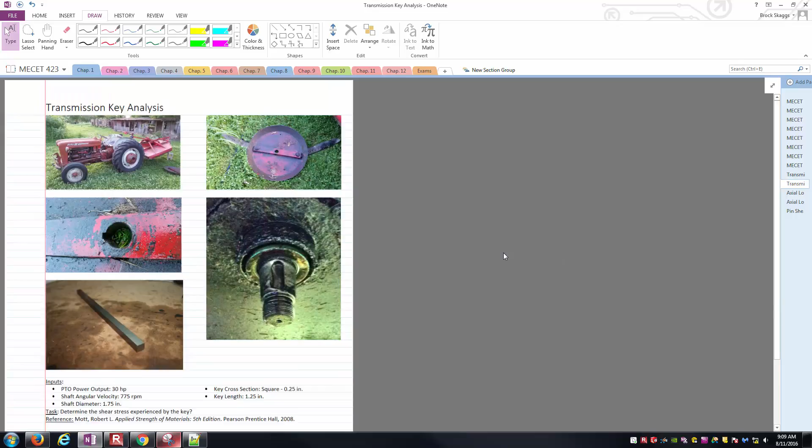Got a few images here to kick the problem off. Top left we've got a tractor, a 1960 Ford 601 tractor that we call Ginger, and on the back end we've got the brush hog here. We're looking to replace the key in the brush hog.

If you're not familiar with a brush hog, it's basically a big old mower. Underneath the deck here, you've got this big plate I've been told is called a stump jumper, and you've got the two blades sticking off of it. If you look under the deck, after you've removed this, you've got this shaft coming down.

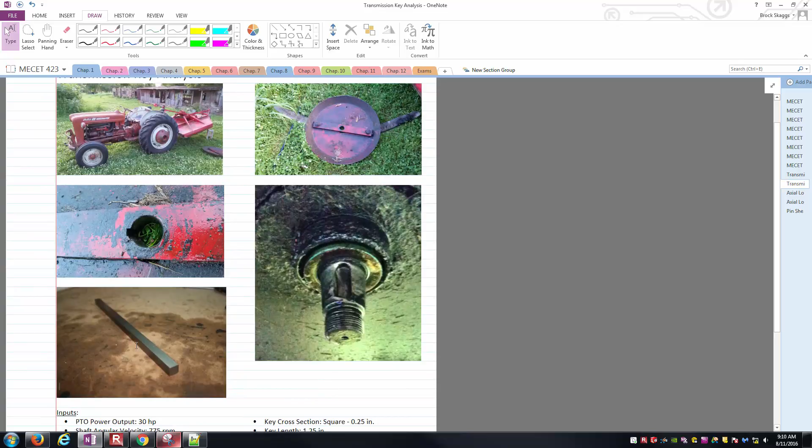In the shaft, you've got this milled key seat, and also in the stump jumper you've got this nice keyway that matches up with it. The idea is you go and buy key stock of the correct size from the store, looking something like this. You cut it to the correct length and stick it in the key seat here. It also fits into the keyway here.

So when the shaft turns, it's able to turn the stump jumper and turn the blades, and of course knock down your brush.

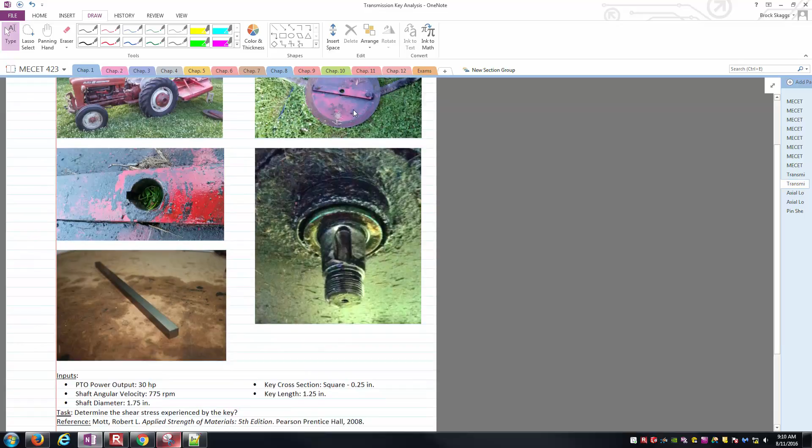So the idea is, if I know some things about the brush hog, the PTO of the tractor, and some stuff about the key geometry, can I figure out what the shear stress experienced by the key itself is? That's what we'll be looking at in this problem.

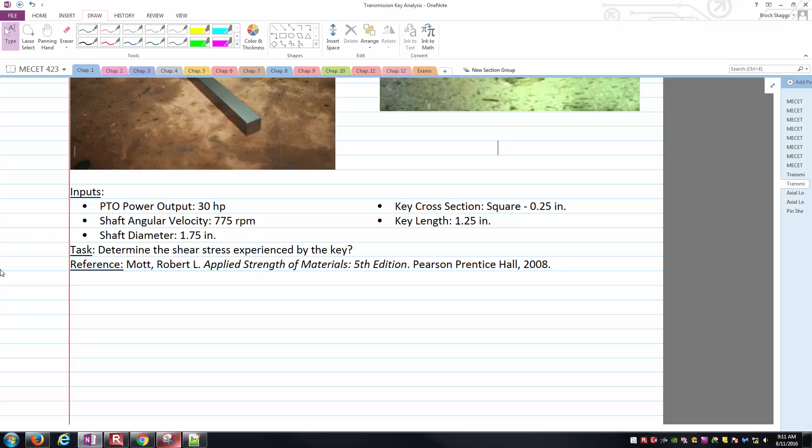To give us some numbers to play with, the PTO power output is roughly around 30 horsepower for the tractor. I'm assuming the shaft on the brush hog is spinning at roughly 775 RPMs. The shaft diameter, this diameter right here, is roughly 1.75 inches. The key cross section is a square cross section, so each side length is 1/4 of an inch, and I'm going to say the key length is 1.25 inches.

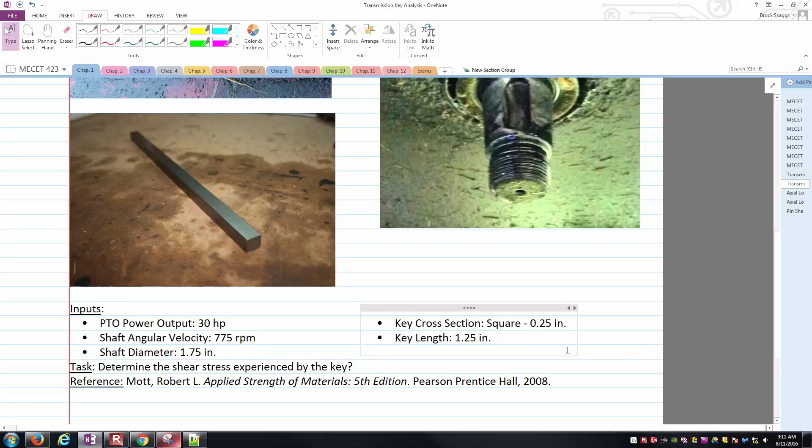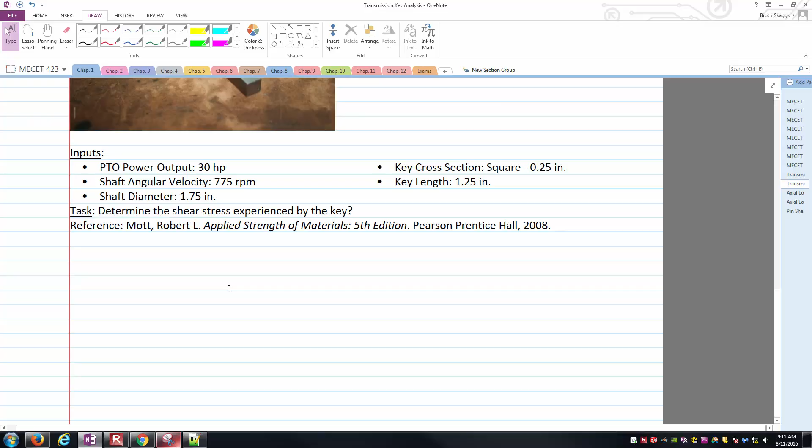This shows just the raw key stock, and then I cut a 1.25 inch section off of it. So the task now is: with that information, can I calculate the shear stress experienced by the key itself, if these conditions are correct?

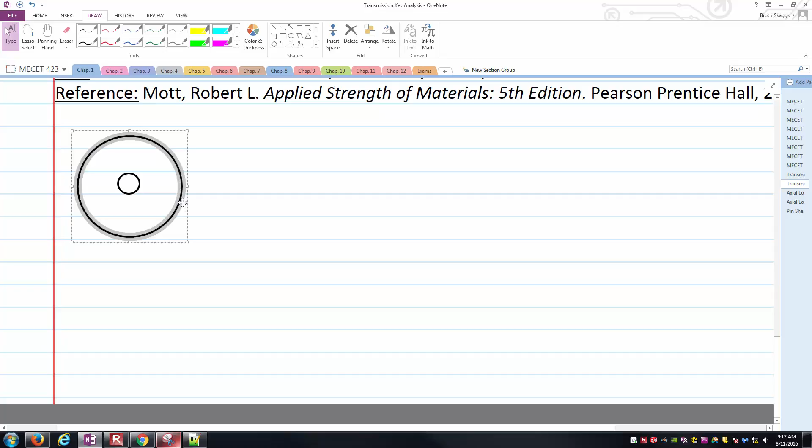Let's do a little thinking about how this problem sets up. I'll make a brief image here - a very simplified view of the key and the stump jumper, that big steel plate the blades are attached to. Let's say that smaller circle is the shaft, and this bigger circle represents the stump jumper plate. What connects them, able to transmit the torque, is our key. We'll draw a key right about here, just like so.

So the idea is, let's say the shaft of the brush hog wants to turn in this direction, clockwise. That means on the very bottom surface of the key, it's going to feel a force pushing it off to the right there. On the top side, you're going to have at least the inertia associated with the big old steel stump jumper plate and the blade itself.

If it's in operation, you're going to feel all the effects of it hitting stuff - weeds, tall grass, possibly small tree saplings, and everything else you've possibly run over. It's going to feel this force going off to the left on the top side of the key.

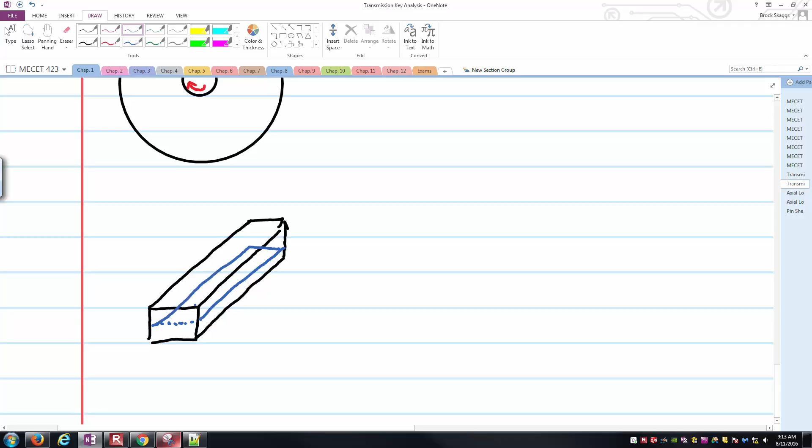If I draw a key down here below, we can start to see this shear stress set up. Say there's the key cross section, here's the length of the key itself. What's going to happen is right in the midplane of this key, on this surface I'm outlining in blue, which is right in the middle of it, we're going to have these shearing effects felt here.

Basically, on the very bottom edge of that surface, we're going to have a force going this way, and a resisting force going on the top. You can see those forces are in parallel with the plane of the area itself.

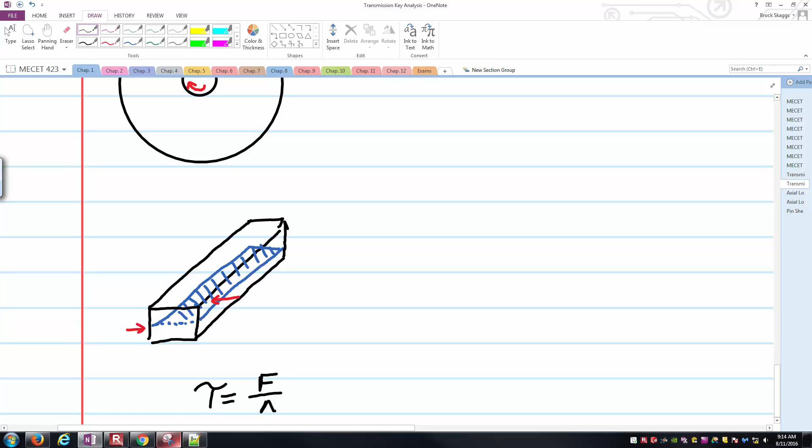So hopefully that's keying you off to thinking, well, hey, there's going to be some shear stresses, tau, and it's a direct shear stress application, so our formula is just like so: the force over the area in shear, where this force would be the magnitude of these shearing forces trying to shear the key in half along that plane.

And the area in shear would be the area that I've shaded there. And so just knowing some things about the geometry of the key, this length here we'll call W, that's the 1/4 inch square side length, and this here would just be the length of the key. So the area in shear would be the product of those two values. That's fairly easy. But what about the force?

If I look up in my inputs, I'm not given any forces at all, right? I'm given a power in horsepower and angular velocity in RPMs. And really that's the closest thing as I have to a force. So we have to start thinking about this a little bit.

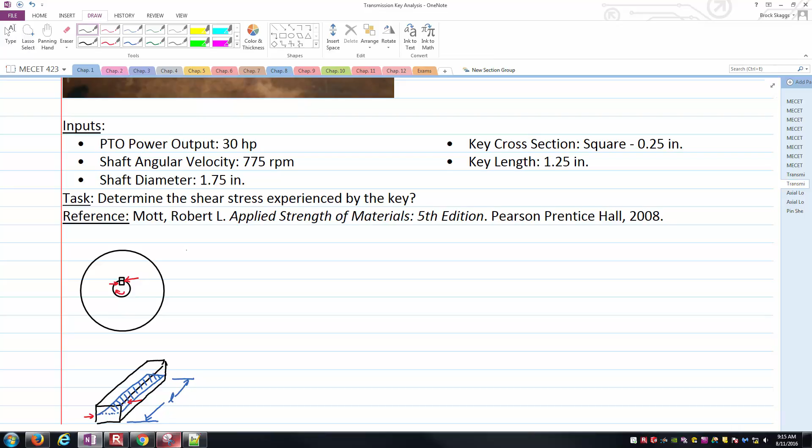One of the things we can do is go from this power and angular velocity to the amount of torque that the shaft is trying to transmit to the stump jumper through the key. And then from the torque, we should be able to relate torque to force, right? T is R crossed F if we're just thinking of vectors in general. So that'll be our route to go. We'll take the power and the angular velocity, we'll get our torque. From the torque, we'll get the force. And then after we have the force and the area in shear defined, we can calculate our shear stress experienced by the key. Let's jump right into that.

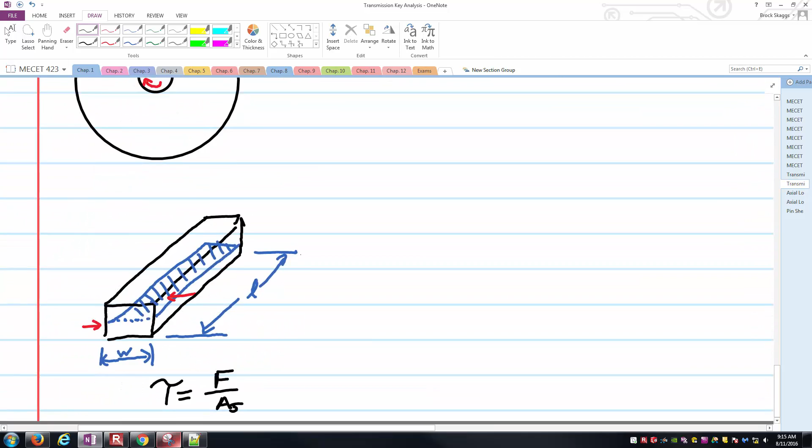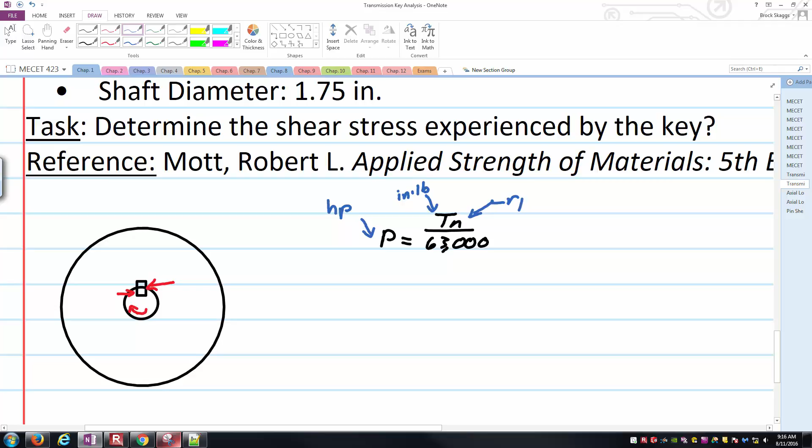First things first, how do we connect power, torque, and angular velocity? In our reference here, found in chapter 4, the formula is P equals Tn all over 63,000 for this type of problem. I say for this type of problem because the 63,000 is just a conversion factor. In order for that to all work out, this P has to be in horsepower, the T has to be in units of inch-pounds, and the N has to be in units of RPMs for the angular velocity.

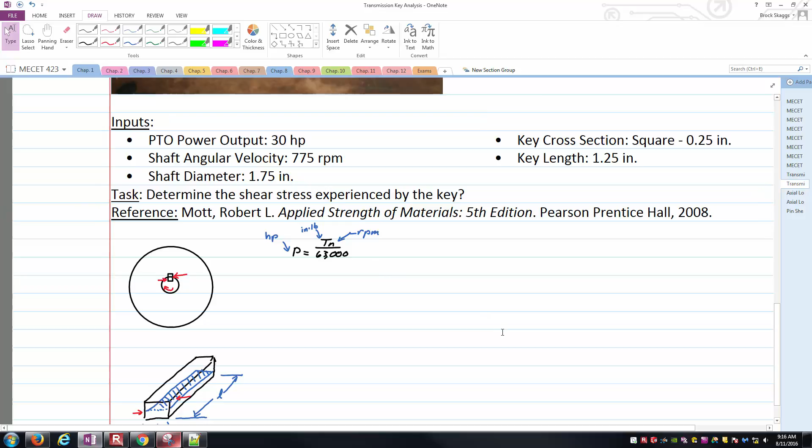And looking back at our units, that's exactly what we have, right? Power is in horsepower, the angular velocity of that shaft is in RPMs, and so now I can solve for the T value, and it'll come out in inch-pounds. So you just have to always be careful of our units here. Let's go ahead and do that right here. T is going to equal: P times the 63,000 unit conversion factor all over the angular velocity N.

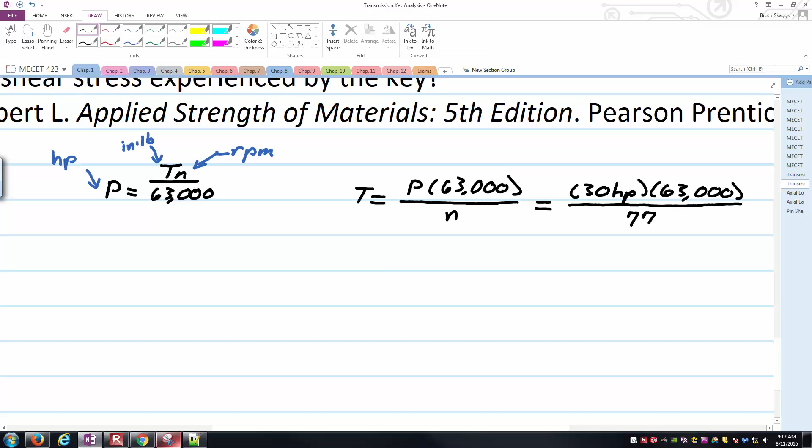So P we said was 30 horsepower times that big conversion factor, 63,000, and then we're dividing it by the angular velocity of the shaft, which we're saying is turning at this instant at 775 RPMs.

Let's slide over here a little bit and see if we can get a value for that. So 30 horsepower times 63,000 divided by our 775 RPMs, I'm getting roughly 2,438.7, units here are in inch-pounds. So getting close to 2,500 inch-pounds. And so that's the torque.

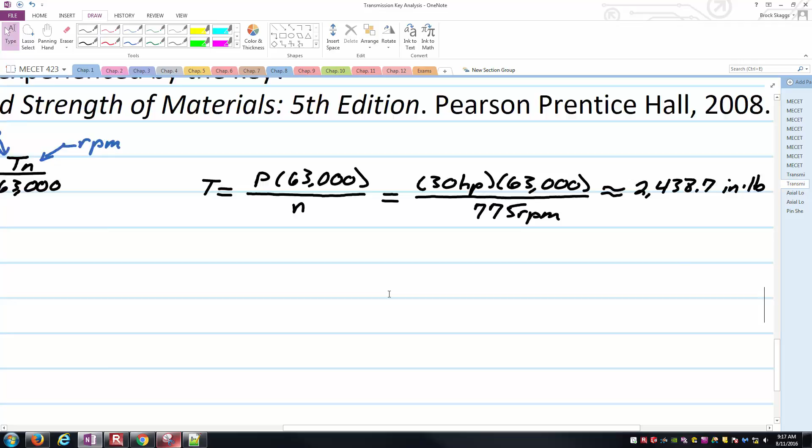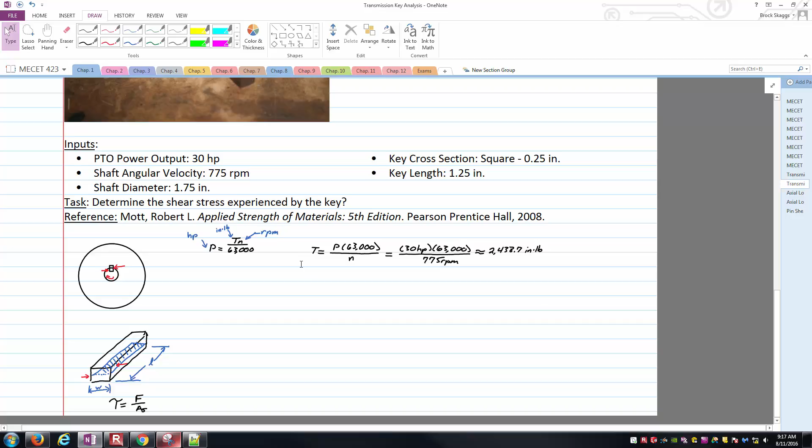But again, we're seeing our home formula, our final formula is going to be tau is force over area in shear. Well, torque is not force, right? So we've got to take this torque value and figure out the force itself. Thinking back to kind of very base general definitions, we've got a definition that torque is always equal to R crossed F, we could deal with if we wanted to play with vectors and the cross product there. Or, this is a little bit more simplified, I'm just interested in the scalar magnitudes of these vectors.

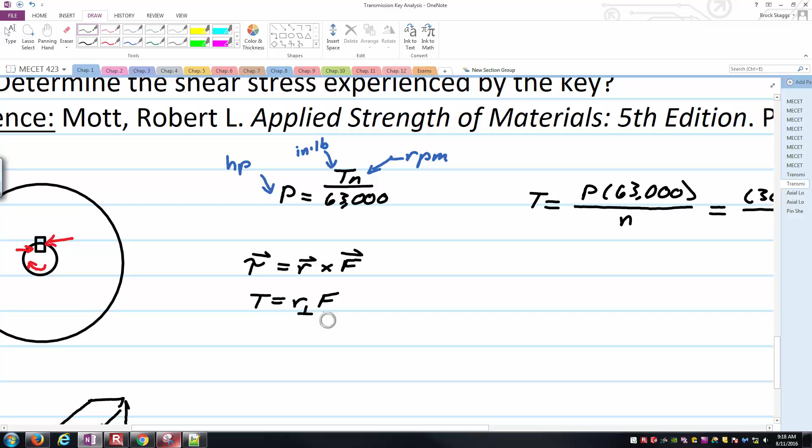One way to look at it is T equals R perpendicular times F, right, where we know that the position vector, or the position R, if I draw a line from the point of rotation that the torque's about to the line of action of the force F, I've got to have this perpendicular relationship here, which should be able to work for us in this application. So if I slide back over to my simplified image here, it's almost as if I'm underneath the brush hog looking up at the shaft, the key, and the stump jumper with, of course, the blades coming off of it here.

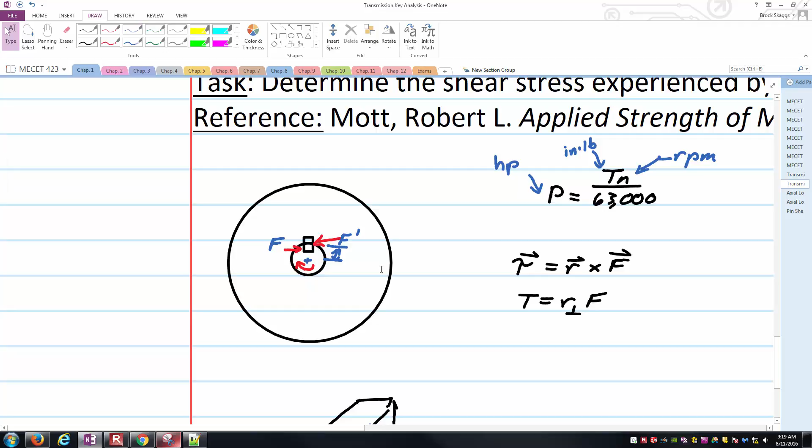Well, the point of rotation, the point of application of that torque is right here in the middle of the shaft. Here are the forces we're trying to get a magnitude of. The perpendicular distance would just be this vertical distance here, also known as the radius of the shaft. And so we should be able to use that to get us to the force.

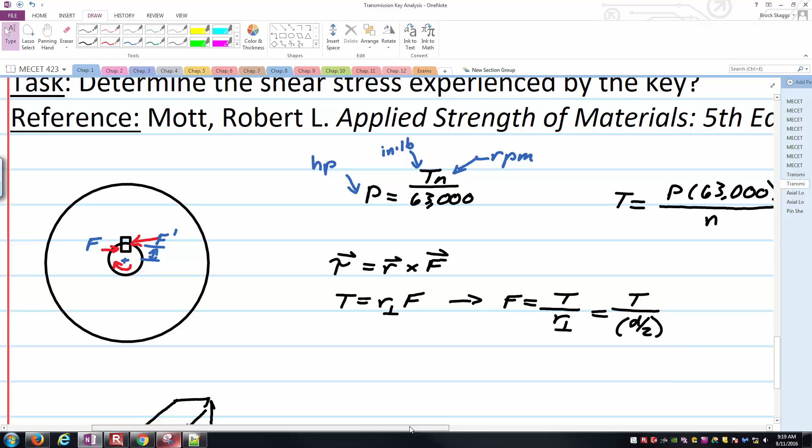With that being said, I can solve this formula for the force. Force here is T over R perpendicular, just using some algebra. We said that R perpendicular is just going to be the radius of the shaft, or I'll call it D over 2, where I'm using the diameter of the shaft. And so this comes up to 2T over D, and now I'm ready to start substituting some values.

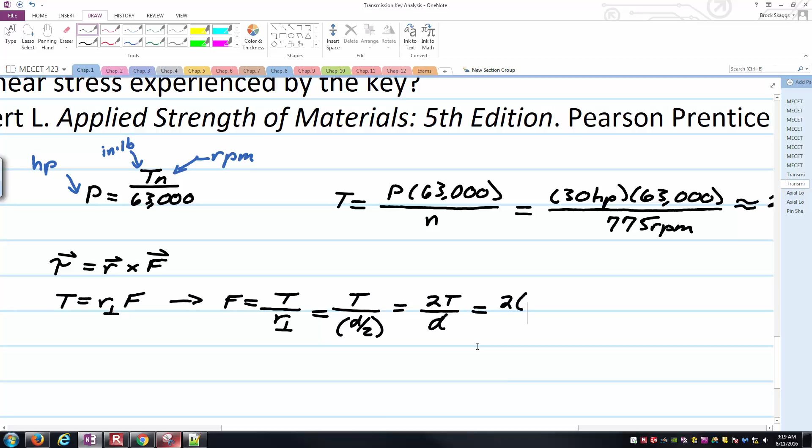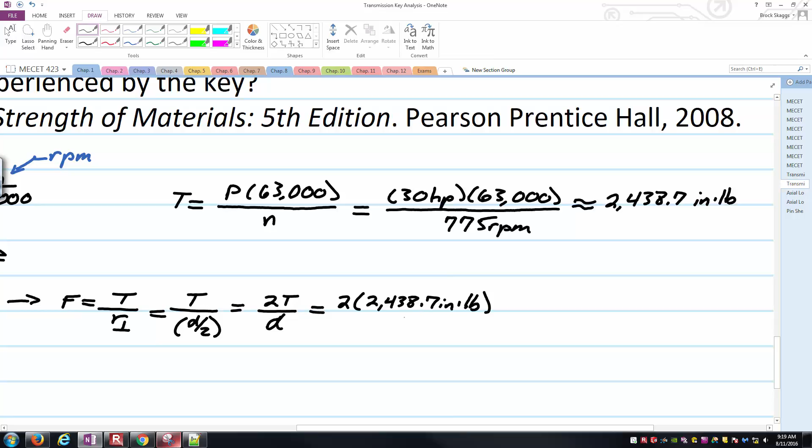So 2 times T, that was the torque we were trying to transmit through this connection. I've already got the value right there in the top right, 2,438.7, that'd be in inch-pounds. And our diameter here, what did we say was the diameter? Shaft diameter is 1.75 inches.

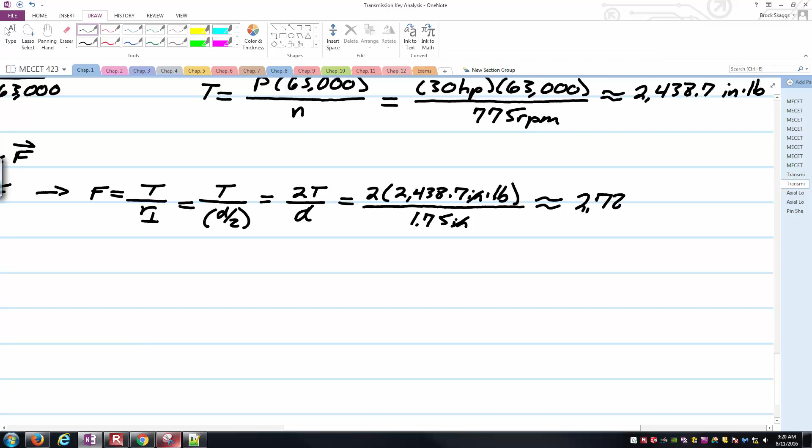There's that. You can see my inches, my unit of length crossing off, which is very nice, leaving with a force unit of pounds. You can catch a lot of errors in your work if you just keep track of units. And so this is roughly 2,787.1 pounds here. So what is this?

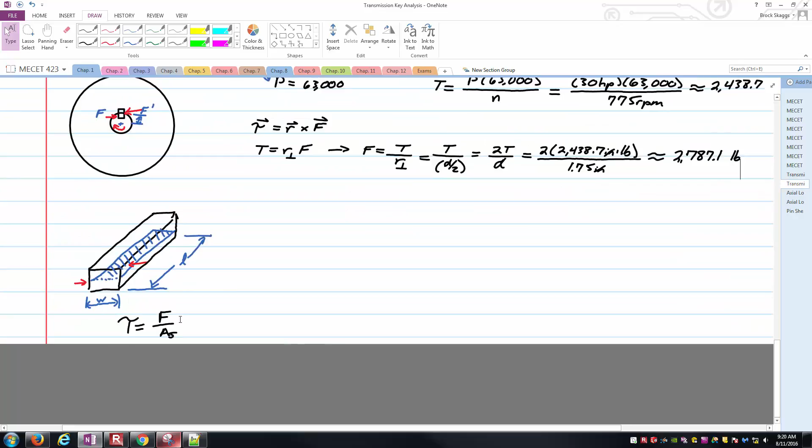Well, this is the shearing force experienced by the key itself. This is the actual F value that we're hunting for in our shear stress equation. And so now we can solve for shear stress.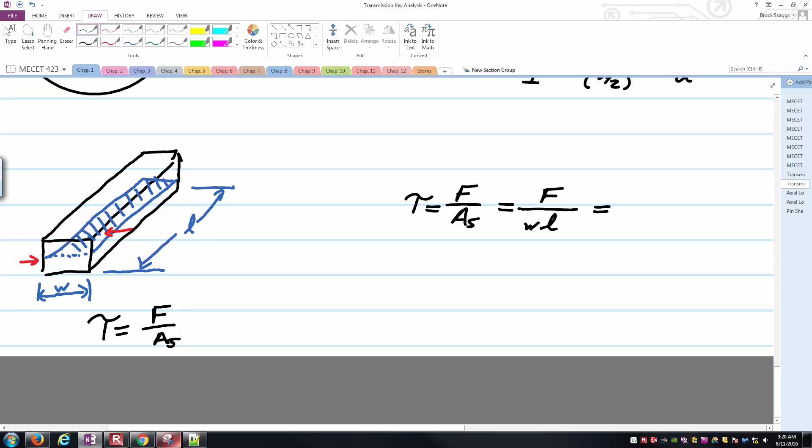I'm just going to rewrite that up here. Tau is force over area in shear. We've already got a good handle on the force. How about the area in shear? That's just going to be the width of the key times the length of the key. And so we are on our way.

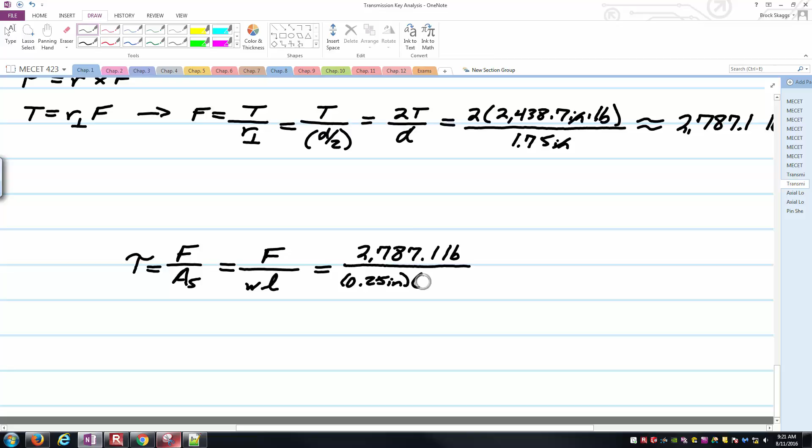So the force, 2,787.1 pounds here. The width of the key, that's just the 1/4 inch square side length here. The length, we cut that key stock off and we said the length was 1.25 inches.

Another way to work these types of problems is a design-oriented problem, where you'd have to figure out what the acceptable length would be. But here we're just doing analysis, so we're given all the geometry and we're just saying, hey, what's the shear stress? Computing this value should get us that.

So 2,787.1 divided by the product of 0.25 and 1.25. I'm arriving at 8,900, and we'll say 19, rounding to the nearest unit. 8,919 units here, pounds per square inch, so PSI right here. And so that is the result we were looking for.

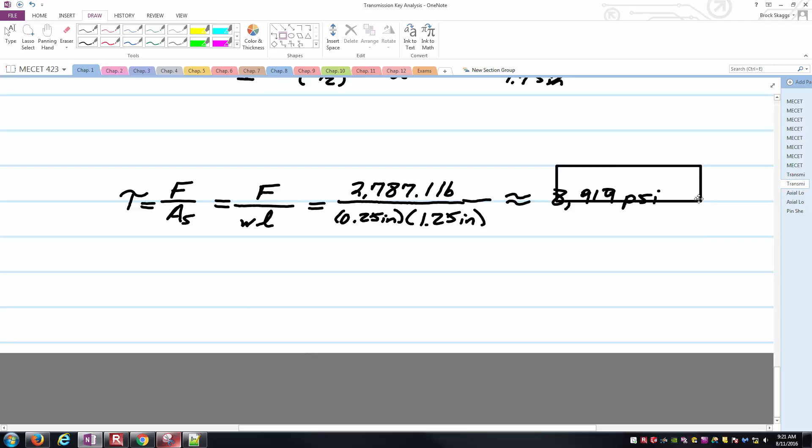So, determine the shear stress experienced by the key. We would say the shear stress experienced by the key is approximately 8,919 PSI there. And so that should conclude our problem.

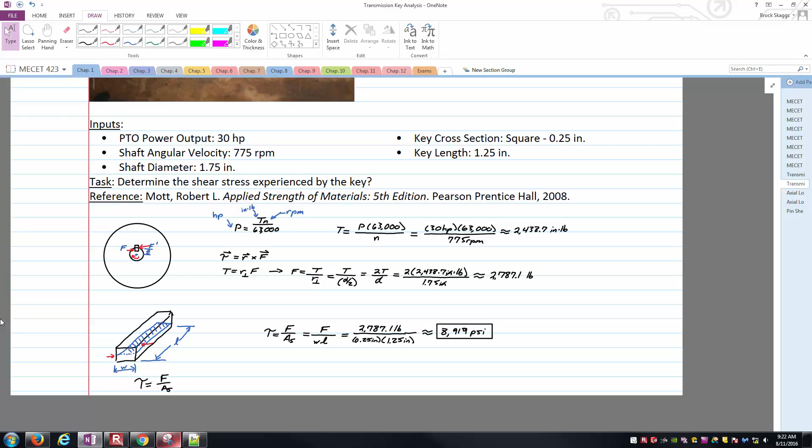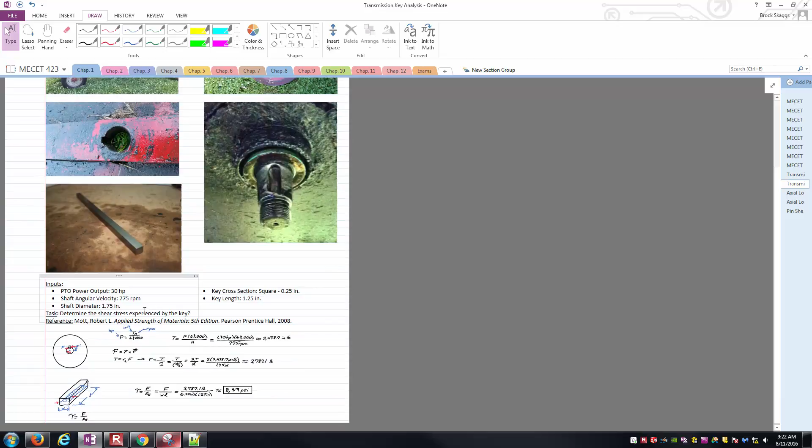Again, just to recap, we're looking at determining the shear stress experienced by the key in this kind of transmission area, where we've got the shaft, vertical shaft of the brush hog, coming down to the large steel plate, I believe called the stump jumper, which then goes out to the blades itself. And so what we've done is we went and we knew a little bit about the power trying to be transmitted through the system, as well as the angular velocity of that shaft itself.

From that we were first able to arrive at the torque, and then we used our knowledge of the relationship between torque or moments and forces in order to come up with the shearing force. And then we looked at the actual forces being applied to the key itself, noted that the forces are acting inside the plane of the area of the material of the key itself, and so that's where we've got that shaded area of the kind of midway plane between the key itself where those shearing effects are going to happen, and the forces are acting parallel to that plane, so that's shear stress.

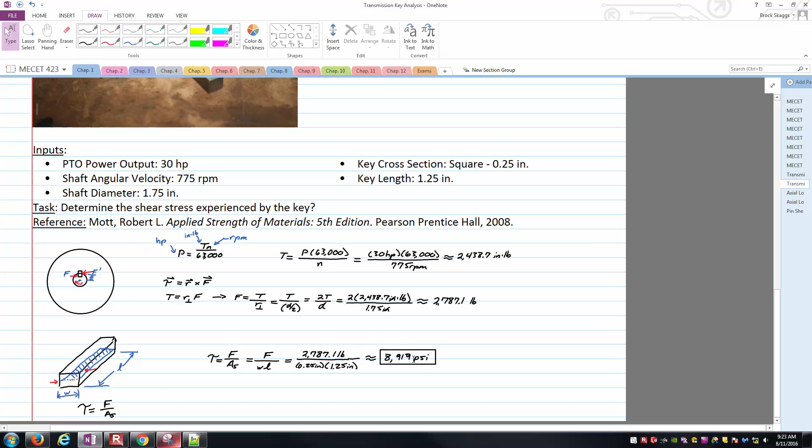Notice I'm using tau here and not sigma. And we know that the equation for this type of shear stress is the force divided by that area in shear. So we figured out the force, simple geometry tells us what the area in shear is going to be, and we've got a value of roughly 8,919 psi for our shear stress. Again, thank you for watching the video, and hopefully this helps you understand shear stresses and keys.